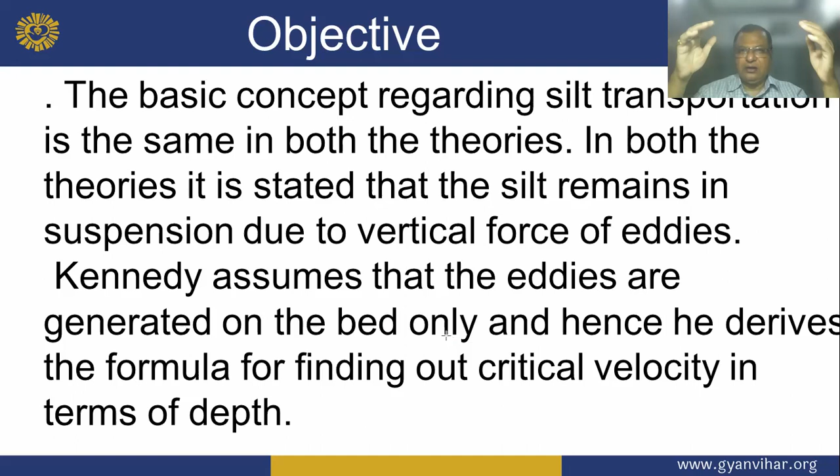My dear boy, when it is a theory, when you keep a larger bed, larger area, then flow will be much generated. So eddies will be in suspended condition, but if it is a short area and slope is very less, then eddies will be generated.

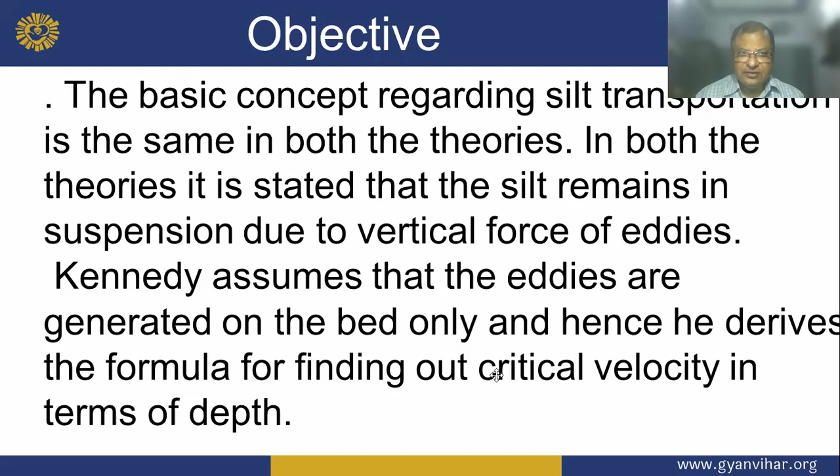Lacey proposed that a regime section is semicircular ultimately, and eddies are generated along the whole wetted perimeter.

I want to show the diagram. First, Kennedy wants to draw this type of thing, and Lacey wants this channel, and this channel, like this.

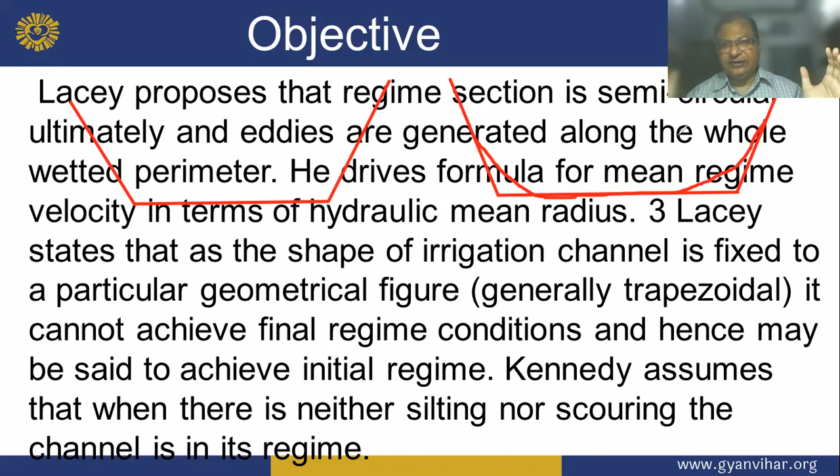It means in any part of the canal, kinetic energy will be developed. In this section, my dear boy, kinetic energy will be slow, but in this section, when the canal will flow, kinetic energy will be developed and no particle will rest on the bed. Clear?

Lacey proposed that the regime section is semicircular, that you have seen, semicircular. Ultimately, eddies are generated along the whole wetted perimeter. He derived a formula for mean regime velocity in terms of hydraulic mean radius.

So Lacey states that the shape of the irrigation channel is fixed to a particular geometrical figure, generally trapezoidal. Just you have seen, this is the trapezoidal shape, this section will be trapezoidal. This corner has been removed, this corner has been removed, this corner.

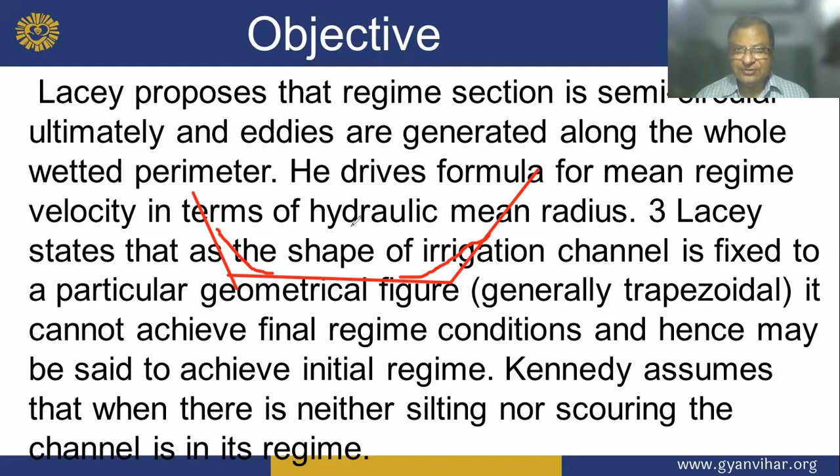Now he derived a formula for mean regime velocity in terms of hydraulic mean radius. So Lacey stated that the shape of an irrigation channel, when fixed to a particular geometrical figure, cannot achieve final regime condition, and hence may be said to achieve initial regime.

Kennedy assumed that when there is neither silting nor scouring, the channel is in its regime. Neither silting nor scouring.

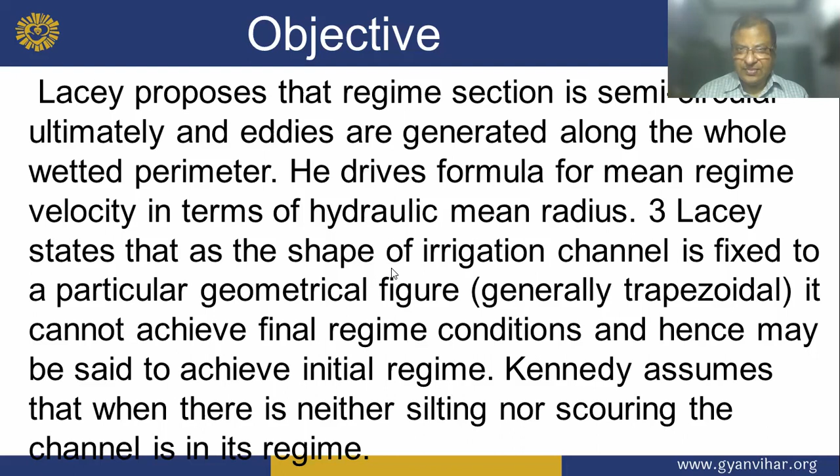Now, Kennedy selected Kutter's formula for designing irrigation channels, but in Kutter's formula, the value of n is arbitrarily fixed. Lacey has not fixed any value arbitrarily.

Now, Kennedy has made use of the term CVR m, but that did not give any basis for calculating it. He simply stated that it depends on the silt charge and silt grade. So Lacey introduced a term called silt factor, related to the mean diameter of the bed material, giving a basis for calculating F.

My dear boy, what is the silt factor? First you should know that. There are so many different rivers in India, and we have constructed so many dams and barrages on the river for diversion of the river. Correct?

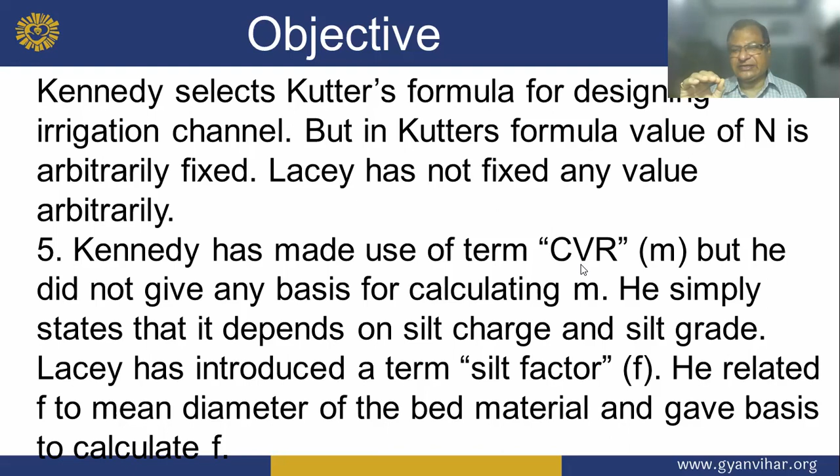If a river is coming from the plain area, then maybe the silt will be fine silt. If the river is coming from the Himalayan belt, a hilly area, the sand will be coarse, and according to this, the velocity will be required.

Kennedy gave no clue for calculating the longitudinal regime slope. Lacey produced a regime slope formula. So design based on the Kennedy theory can only be achieved after making trials. Of course, Woods simplified the procedure by giving a normal design table which provided the B/D ratio.

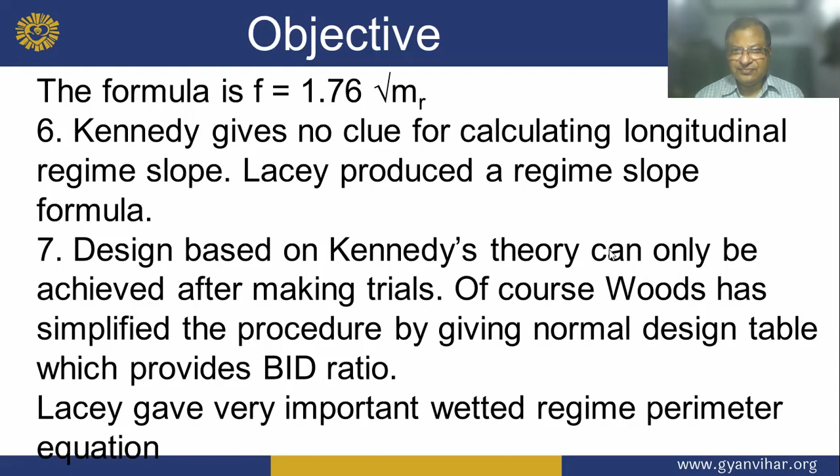Lacey gave an important wetted regime perimeter equation. So PW is equal to a parameter 4.75 into discharge, Q to the power 1 by 2, the under root Q.

He of course admitted that the value of the constant in the above equation is in no way constant, and it varies from 4 to 5.8 from regime channel. Okay, clear?

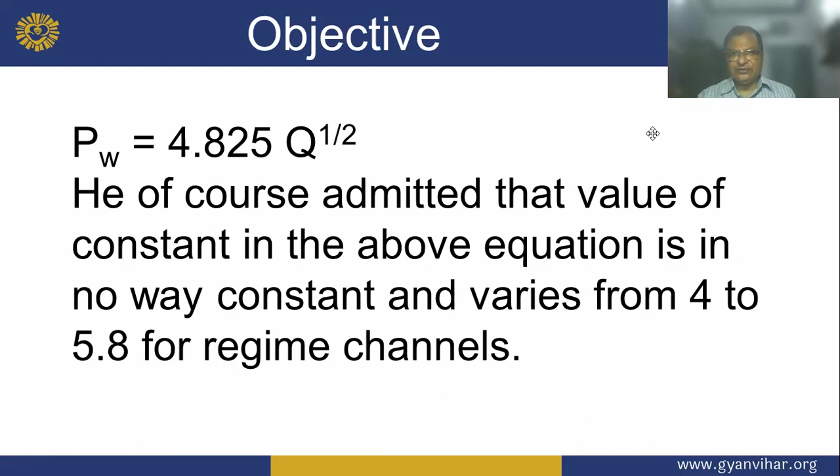Dear boy, the channel design may be divided into two categories, depending upon whether the channel boundary is erodible or non-erodible. For erodible, it means the bed will erode after the resistance of the water pressure. For an erodible channel, flow velocity are kept low.

Now we will understand what is the erodible channel. If, my dear boy, the channel is cut from here, it is made into this type of shape. This is the shape. This is the shape. And so much sand has been filled in, and after the effect of this sand filling, the channel will look like this.

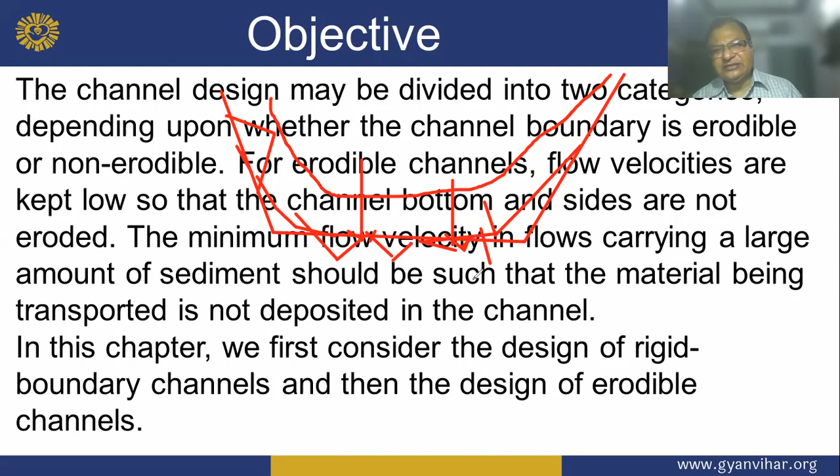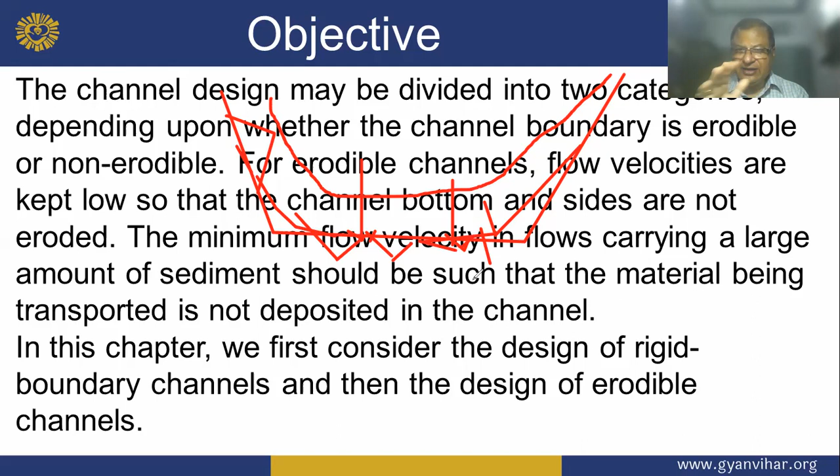Who is giving resistance? Deposited sand. Who is not giving a clear path? Who is giving resistance?

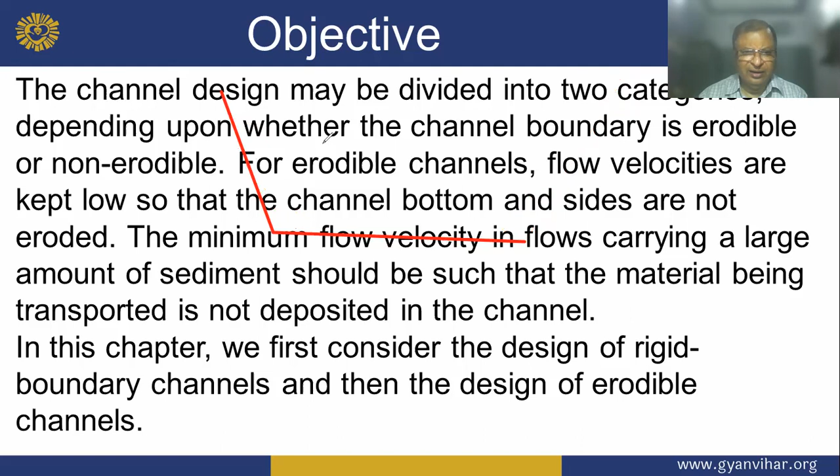For an erodible channel, flow velocity should be kept low. Now you understand why velocity will be low, so that the channel bottom and sides are not eroded. The minimum flow velocity in flow carrying a large amount of sediment should be such that the material being transported is not deposited in the channel.

You have to prepare the channel like this. If sand is coming into the canal, then it should not deposit in the canal bed. It will be in a condition of suspension. No doubt, you will see the water looking some dirty, soil mixed water, but no problem, it is going to the farmer's field. There is soil also available there, but the canal should be safe.

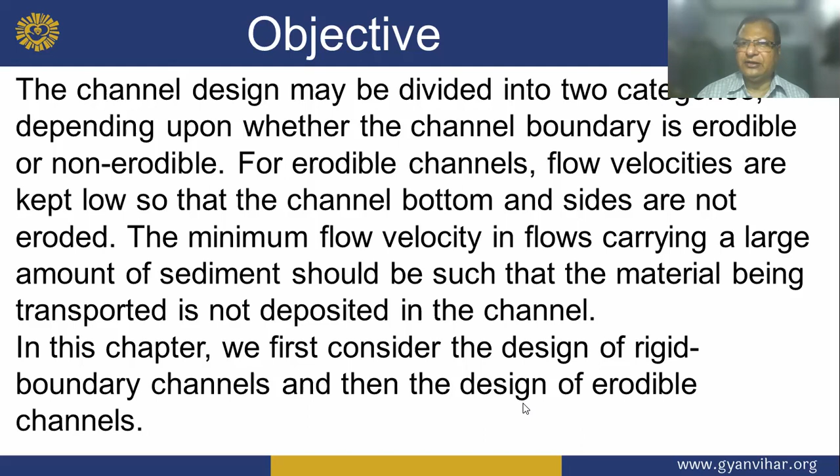We first consider the design of rigid boundary channel and then the design of erodible channel. Taking a lead from the Kennedy theory, Mr. Gerald Lacey undertook a detailed study to develop a more scientific method for designing irrigation channels on alluvial soil. He presented a revised version of his study in 1939, which is popularly known as the Lacey theory.

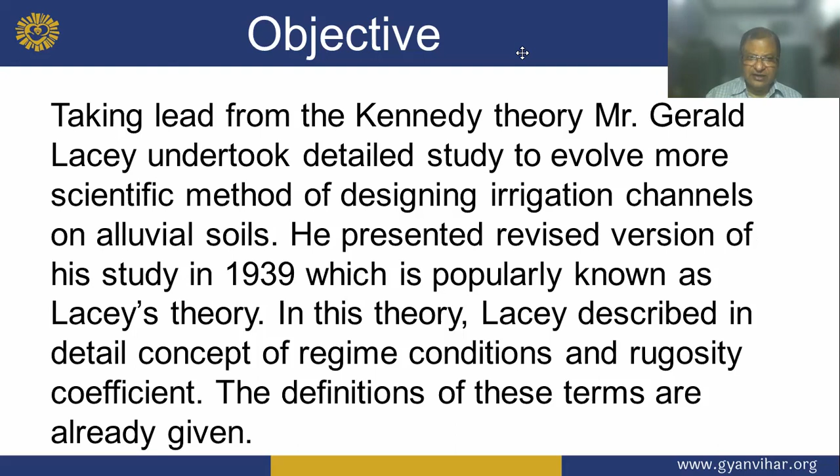In this theory, Lacey described the detailed concept of regime condition and rugosity coefficient. The definitions of the terms are already given, and a river's achievement of the initial or final regime is practically impossible. So only at the bank full stage or high flood may the river be considered to achieve a temporary or quasi regime. The recognition of this fact can be utilized to deal with the issue concerning scour and flood.

Lacey also states that the silt is kept in suspension solely by the force of eddies. But according to Lacey, the eddies are not generated at the bed only, but at all points. At the wetted perimeter, the force of the eddy may be taken normal to the sides.

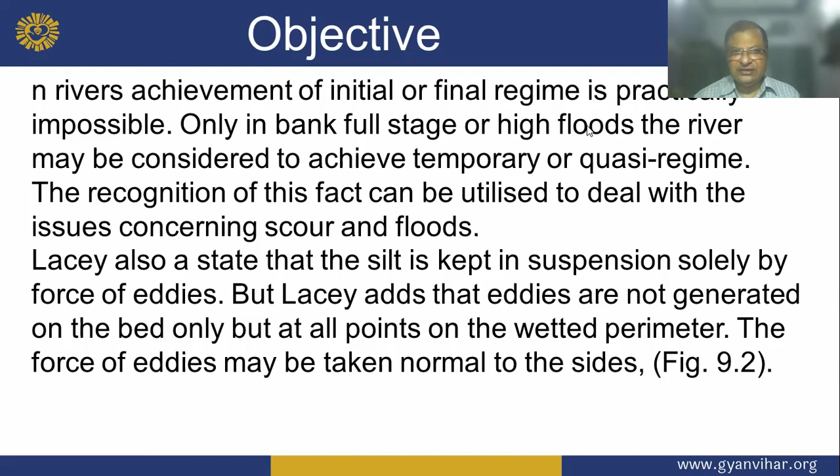And after that, due to this undulation, the speed—the velocity—will be slow, and capacity will also be slow.

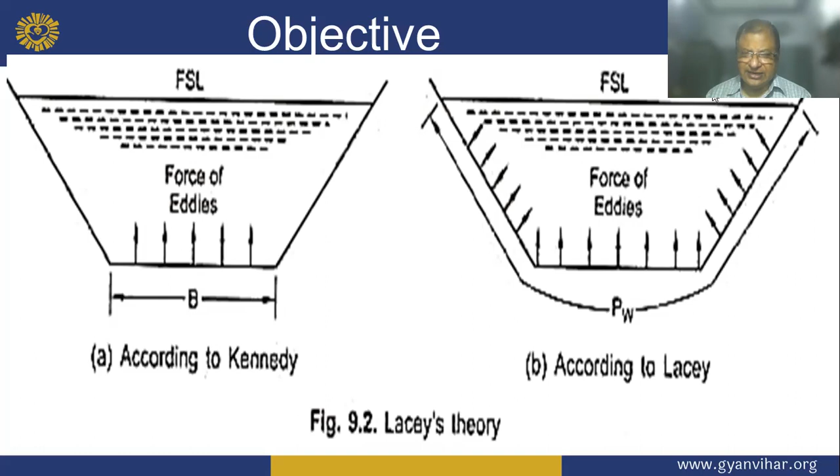So if you have understood this diagram, with these two diagrams you will keep in your mind, you will never have a problem to differentiate what is the Kennedy theory and what is the Lacey theory. Correct? Now, channels should flow uniformly.

Channels should flow uniformly. There should be unlimited alluvium of the same character as transported by water. Silt grade and silt charge should be constant, and discharge should be constant. These conditions are very rarely achieved.

And very difficult to maintain in practice. Hence, according to Lacey, the conception of regime condition may be subdivided into initial and final. The definitions of these two terms were already given earlier. All conditions will be suitable for this, and it will help in a good design. Every step needs to be correct for a good design with data, including what is the silt factor, what is the curve, and everything else. Then you can get it.

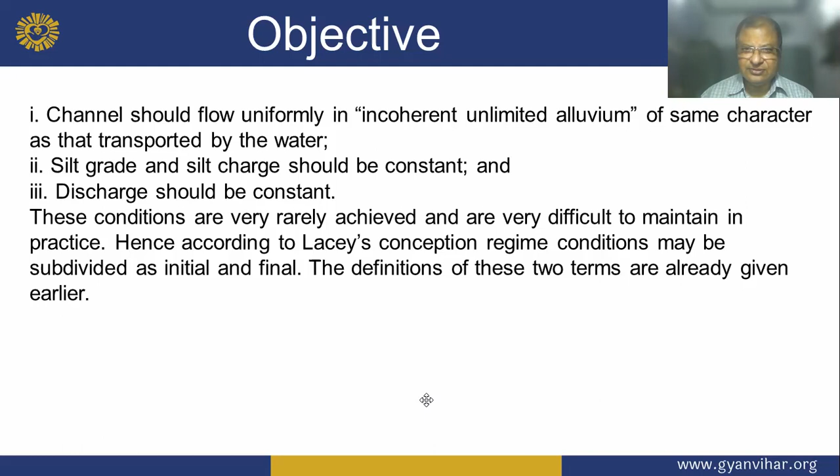Now we will discuss. First, we have discussed what is a channel, how we design the channel, and now we will discuss the types of channel. So many types of channel are available in our work, in our canals.

As required, we have designed artificial channels filled with water and designed for navigation and for irrigating land. Artificial courses are extensively modified natural channels used for inland water transport, and for the control and diversion of water for drainage or irrigation.

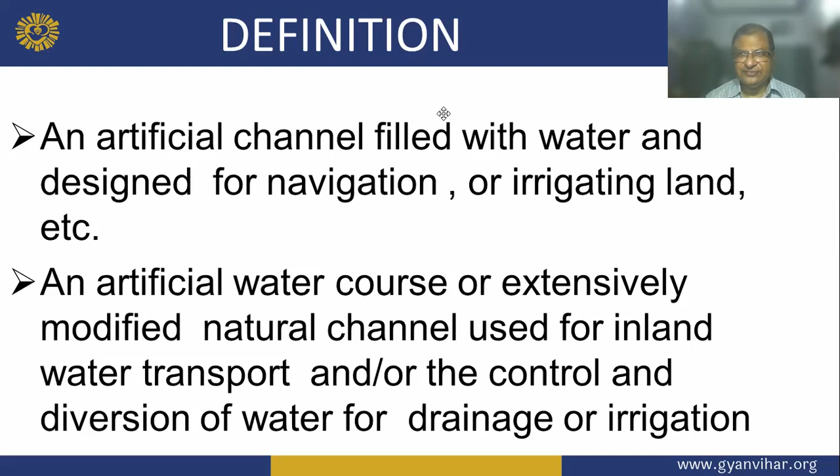Now we will see other aspects. If you have designed a canal or channel, or discussed the unlined canal, the Lacey and Kennedy formulas, both characters, both formulas, both persons, are implemented for the unlined canal. It does not work for the lined canal because the nature of a lined canal is different. All resistance will occur in the unlined canal because it is made from soil.

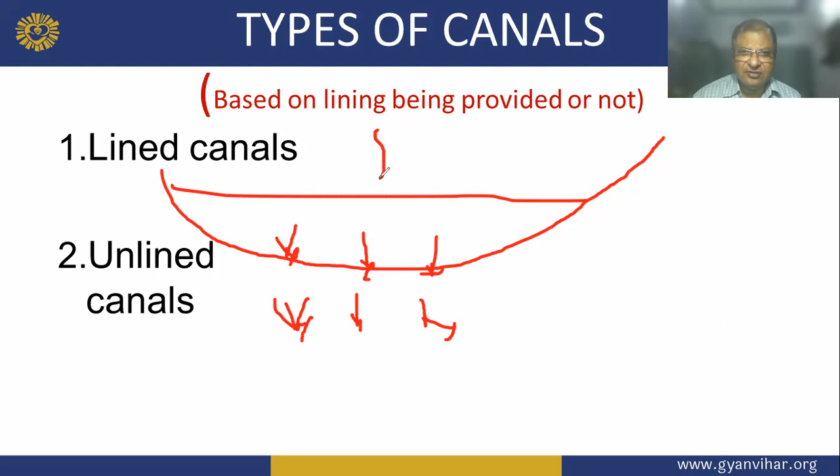So think about how much water will be lost in the canal. I think around 25%. If you send 10 cubic units of water in the canal, you will find that only 7.5 cubic units are available at the end.

So one thing engineers have done is make a lined canal. Lined means they have prepared a concrete layer of this type, so no water can go into the earth. Around 10-12% will be stopped this way, but this water cannot be stopped completely, it will go in the shape of vapor into the cloud. So if you have made the layer of a canal with concrete, this is called a lined canal.

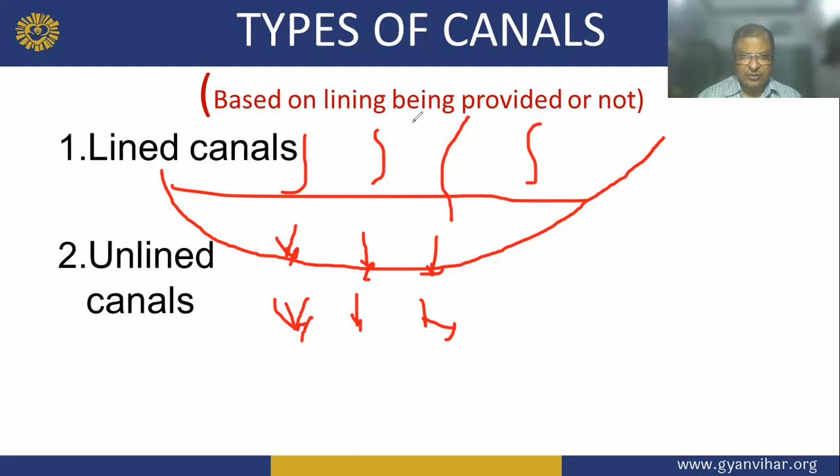Now in this region, water does not go into the earth, but it is the open area, so water can still go into the sky as vapor, but it will not enter the earth. But if it is unlined, then groundwater will be recharged. Correct?

Now, the shape of the canal. One shape is circular shape. Another is triangular shape. This is trapezoidal shape. Trapezoidal or parabolic shape. So these are the four types of canal we are constructing nowadays.

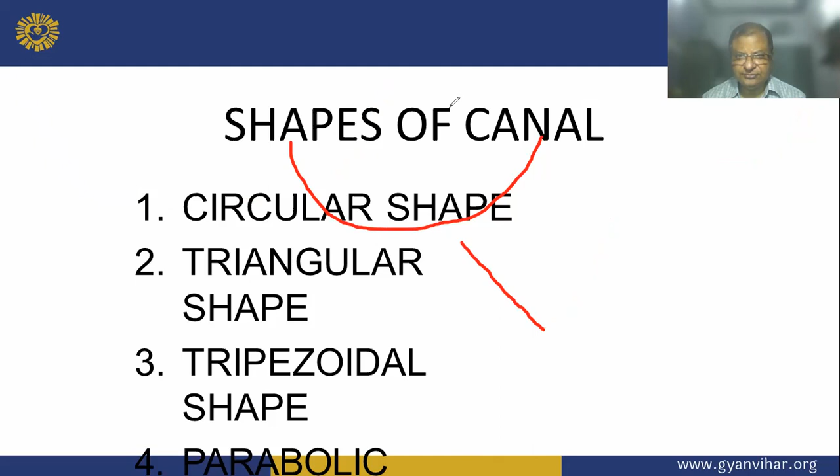Now, concrete lining: the entire canal is made with a concrete layer of around 20 centimeters. Suppose a canal has this concrete layer of 20 centimeters, and water will be stored here.

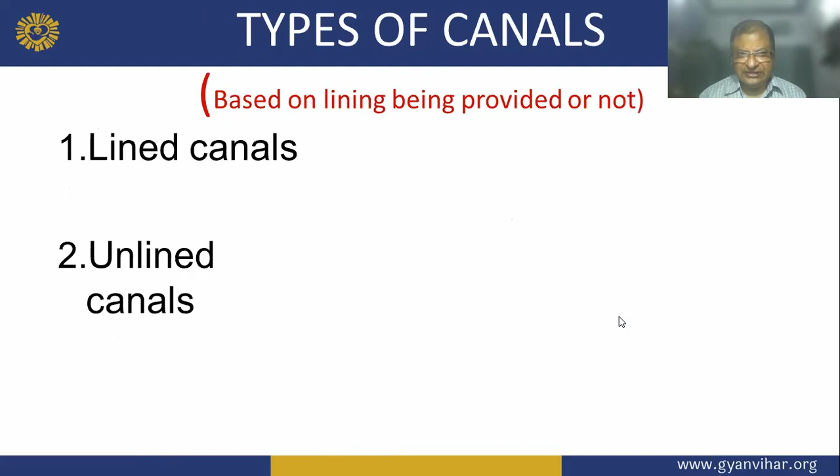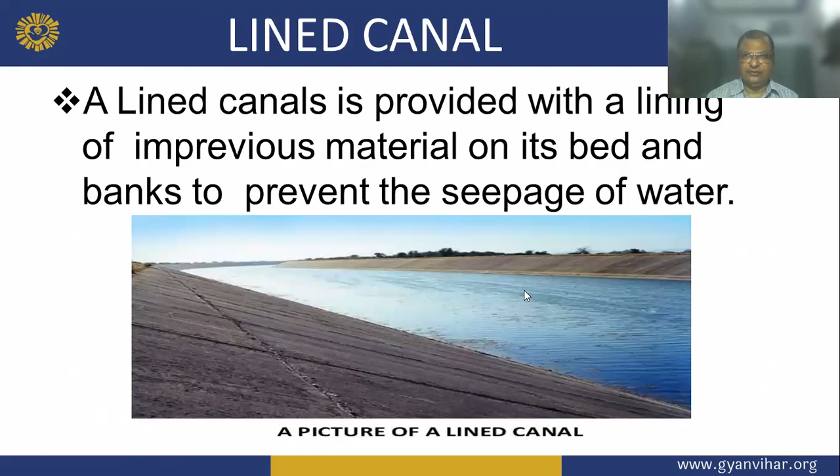An unlined canal is the one which has its bed and bank made of natural soil through which it is constructed, and not provided with the lining of impervious material. Clear?

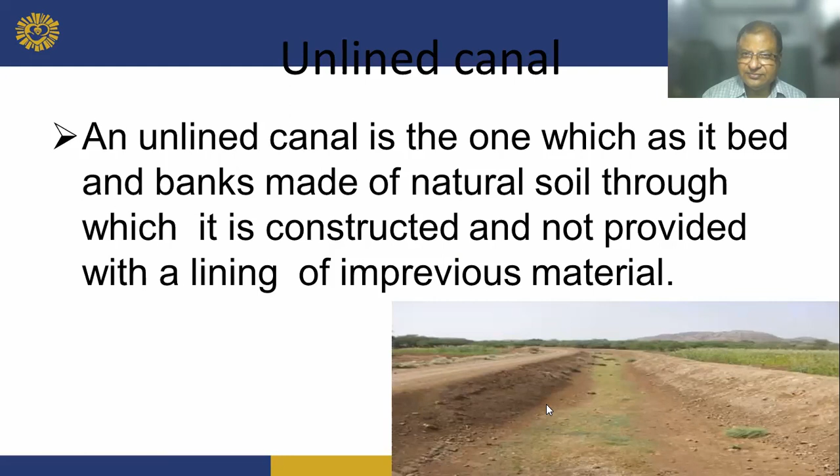So, disadvantages of unlined canal. Its only benefit is that it is cheap. But what is the disadvantage? Water velocity higher than 0.7 meter per second is not tolerable because of erosion, and low operating velocity requires large cross-sectional area. This is the main problem. If you keep the velocity low, silt will be deposited on the bed. If you keep the velocity high to keep particles in suspension, it will erode the bed.

Second disadvantage: high seepage and conveyance water loss results in waterlogging of adjacent land. This is also correct. Waterlogging can develop in any area. How does waterlogging develop?

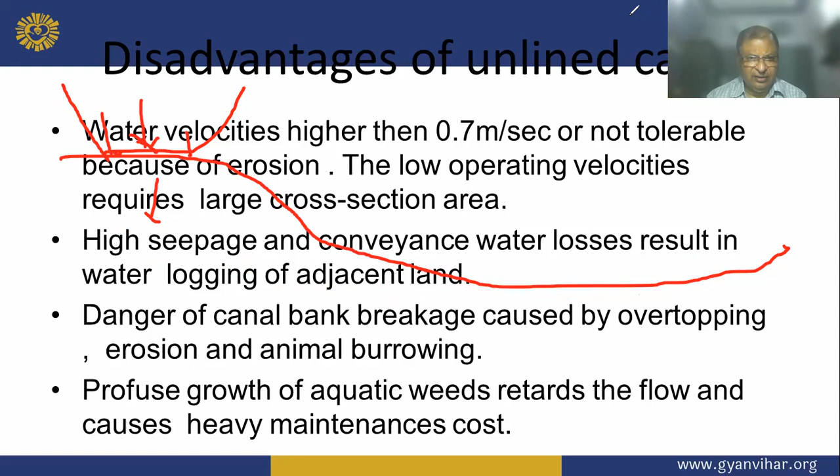Next, danger of canal bank breakage caused by overtopping, and erosion and animal burrowing. This is an earthen canal - when any animal goes to the corner of this bank along with the water, so many animals have dropped into the canal.

Also, huge growth of aquatic weeds obstructing the flow causes heavy maintenance cost. If this canal is running with any aqueduct joining it, the entire area of the canal will demand heavy maintenance. So it becomes very costly in that situation.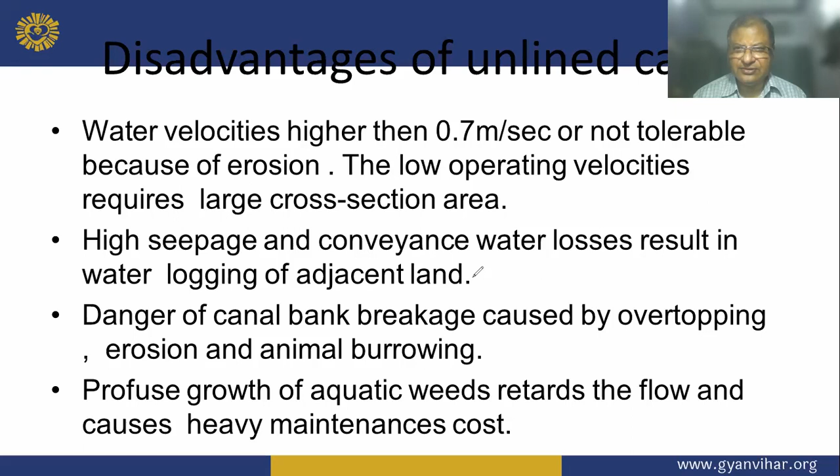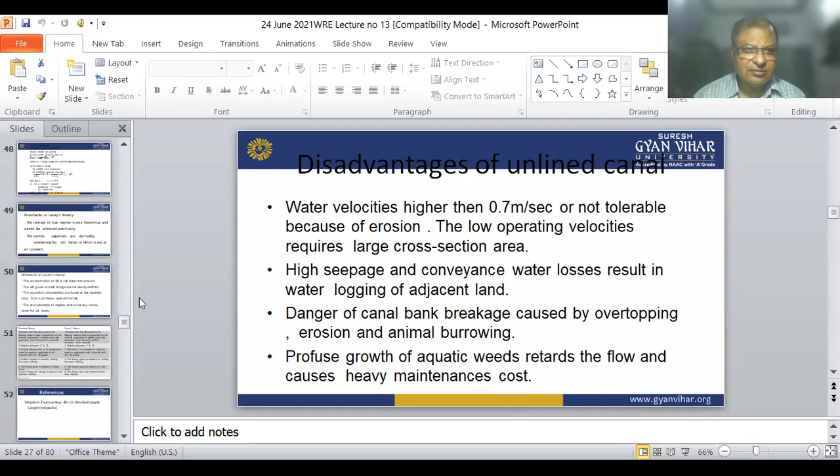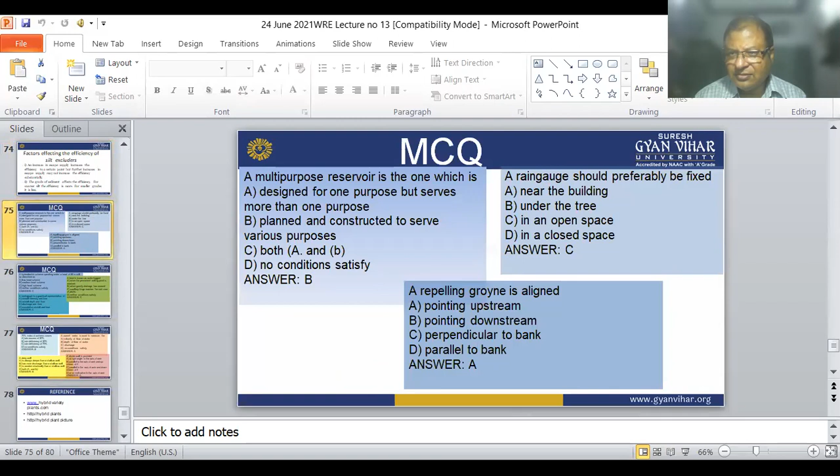Dear boy, remember today's class, and on that I have brought a few MCQs to test your mind. So, a multi-purpose reservoir is the one which is - tell me, what is the correct answer? Correct answer is B, planned and constructed to serve various purposes.

Second question: a rain gauge should preferably be fixed where? Tell me, any boy? Correct answer is C, in an open space.

Now, a repelling groyne is aligned - pointing upstream, pointing downstream, perpendicular to bank, or parallel to bank. What is the correct answer? The correct answer, my dear boy, is A - a repelling groyne is aligned pointing upstream.

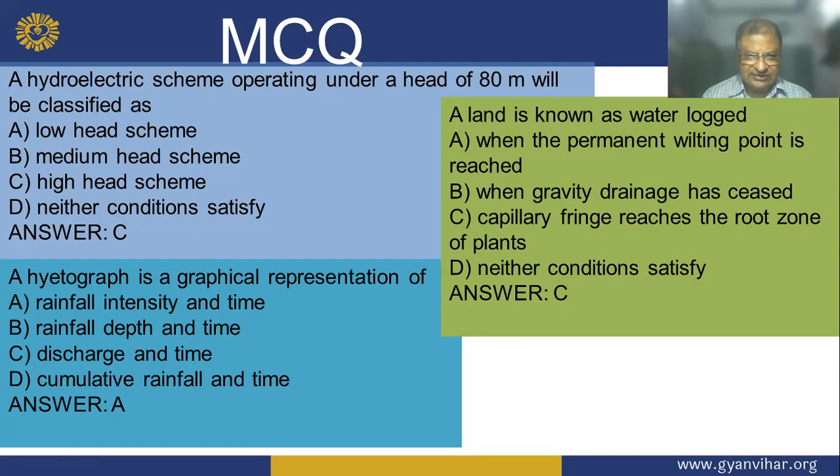Now, a hyetograph is the graphical representation of - the correct answer is A, rainfall intensity and time.